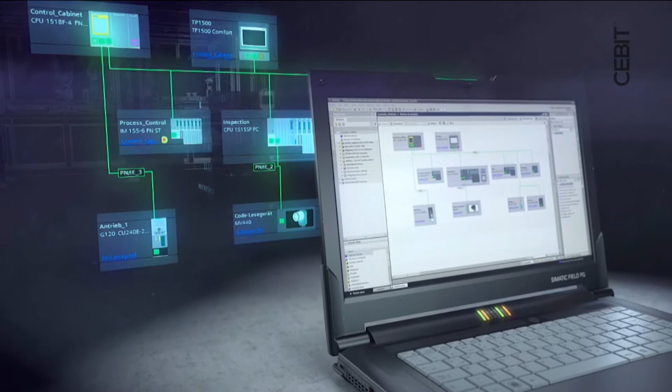Let's be very concrete now, and look at an example of what we did inside Siemens - our program controller, our Programmiergerät, which we conceived, designed, and produced in a digital way. The first step is the digital twin of the product. The digital twin means the digital representation of the product to do simulation, to do the design, and the simulation and verification of your design, in a multifaceted manner - with mechanics, multi-physics simulation, electronics, and software. This is very important because if you only digitize one facet and design only one facet, this won't work. You have to design and simulate all facets of the product.

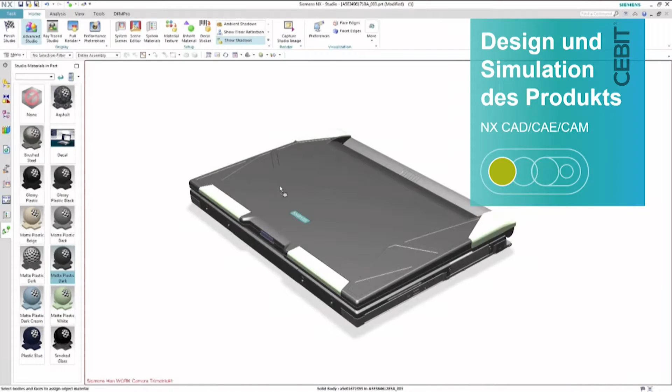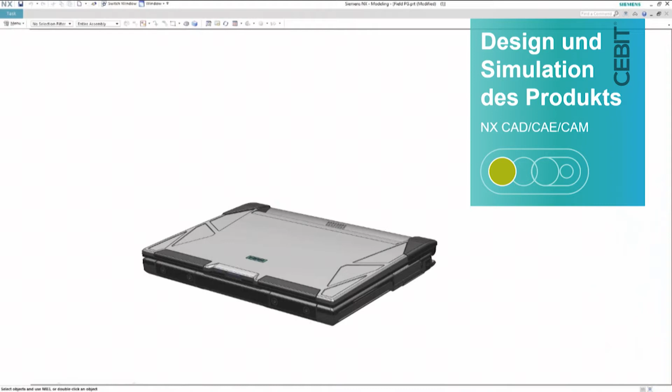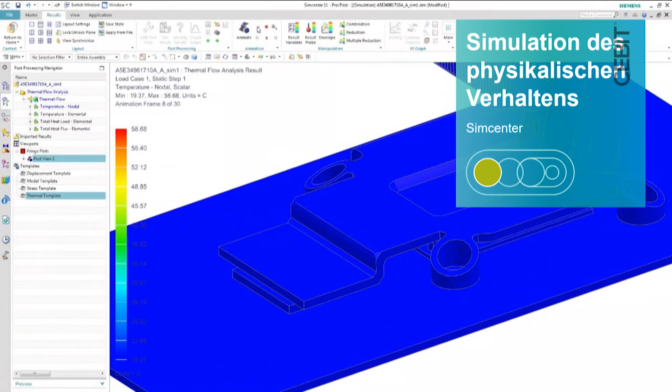To start with the mechanical design, this shows how - and this is not very new, we're talking about CAD systems for ages, 3D systems also - this is about simulating the product. The new thing is that in the same system, the same environment, you can design and simulate your product. So for example, if you're looking at the heat consumption of this product, you can do this with an integrated simulation in your CAD tool.

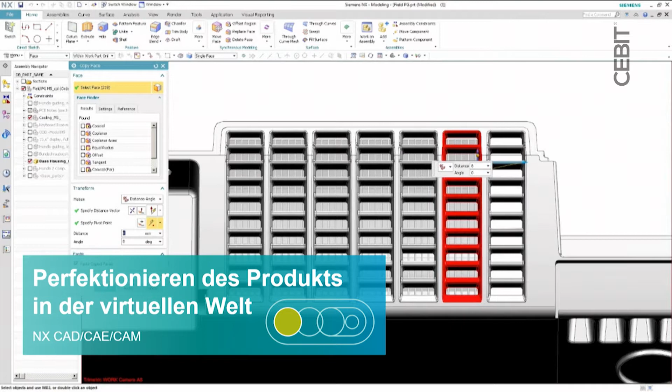Here you see that maybe the temperature is a little bit too high and you want to change the way you do the cooling, and you do this in an integrated way. You use the data you have in your design tool directly for simulation and arrive at an optimized product. So by shifting this a little bit, and in the next step, adding some fans and cooling possibilities, you avoid overheating the product - all in an integrated design of your product.

I'm not focusing too much on the product names. You can remember these are our products, but I was asked to give a presentation on the principles of digitization, not a product show.

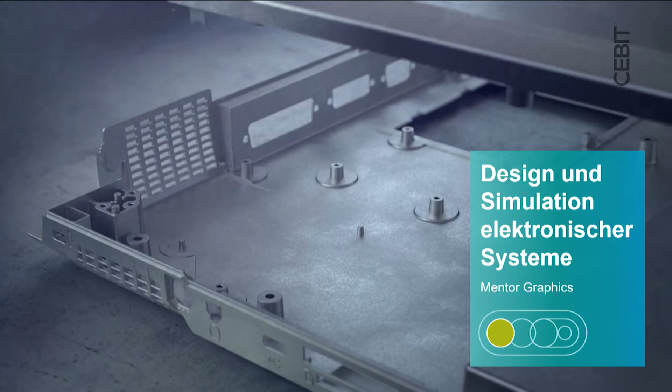Next step is to design the electronic insides of the product. We do this with a lately acquired software tool from Mentor Graphics, which allows you to combine mechanical design and electrical design so that you always have the overview and the interdependencies between electronics and mechanics. And for sure, you need simulation and validation of embedded software.

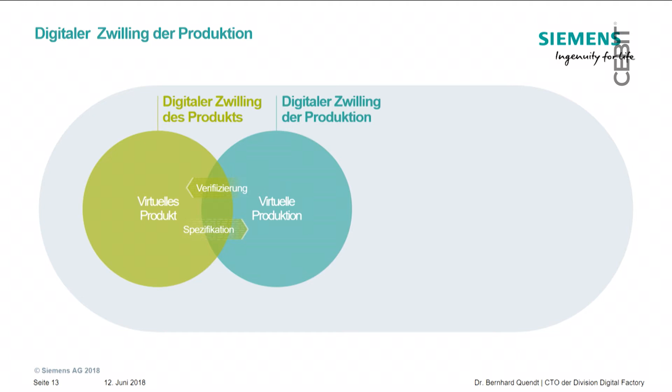With mechanics, electronics, and software together, you have the digital twin of the product. And then comes the next step. In the integrated digital value chain, you have a lot of data already generated during the design and simulation process, and you don't want to introduce this data again for production planning.

So in an integrated digital tool chain, you use the data for your production design, and you generate with the software tools of the digital enterprise software suite the digital representation of your production - we call it the digital twin of the production. So after the digital twin of the product follows the digital twin of the production.

With the data and specification you have from product design, you design your production. You have a lot of automation in production design, and you can use this to verify whether it fits the requirements of your product.

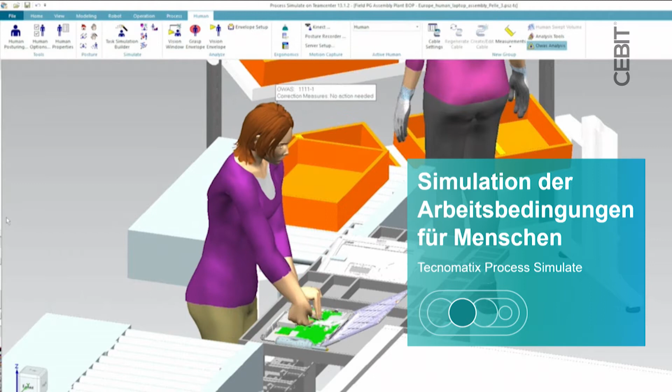I'll continue with simulations for production planning, as there's still important manual work to do in production. We can simulate the environment in which people are working to prevent, for example, any accidents or to prevent fatigue. We can simulate this with our tools.

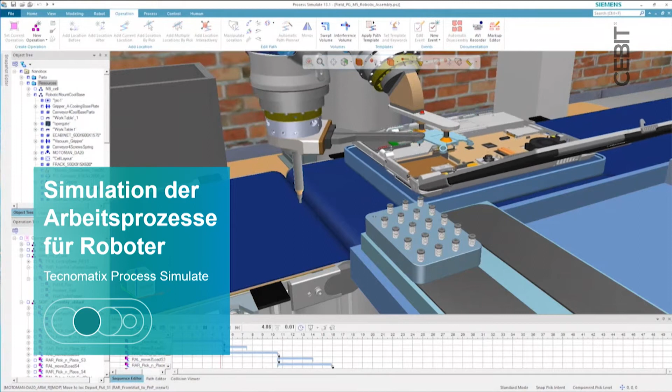For sure, we can also simulate the robots working and the production line producing this computer. There you can see that things like collision avoidance or optimal trajectories of the robots can be fully simulated before you build the production. This is a real asset because you save a lot of time and money if you simulate beforehand.

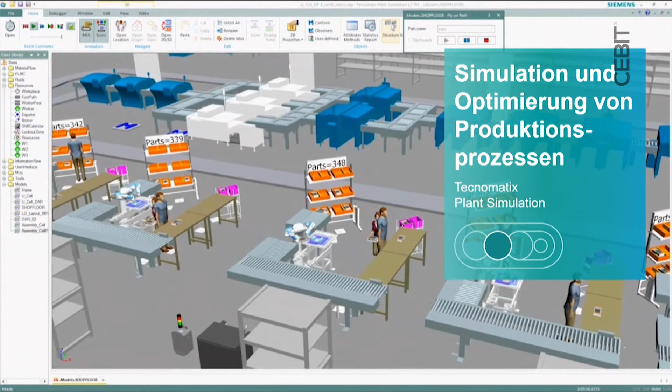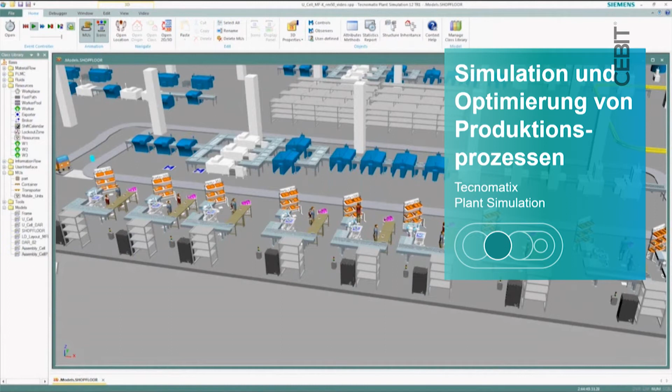Next step, after simulating the production lines, is to simulate the whole production. You can simulate the throughput of the plant, energy consumption, the quality and efficiency of your whole plant - and this is very important to know beforehand. You can also play around with the simulation, changing the order of production or changing some production lines to be more efficient. This is optimization of production planning by means of simulation.

Now imagine that since you have a lot of data transferred from product design to production planning, you can use the data from production planning to do production engineering, to generate the so-called PLC code. The PLC code - these are the controllers that automate the production plants - can be generated out of the data you generated during production planning. Not all the data; sure, you have to do some fine-tuning in the controllers, but you can use and reuse a lot of data there.

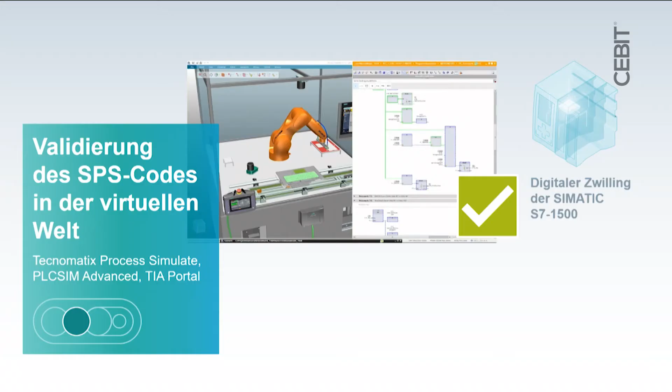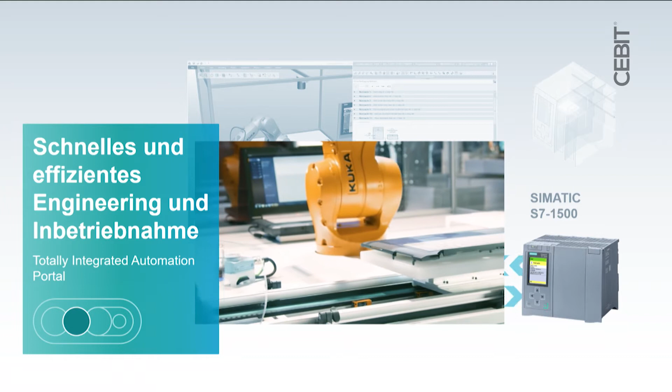You can validate this in a software-in-the-loop measure with the digital twin of our controller, or you can do that in a hardware-in-the-loop way, with the real controller in the loop between simulation and production line. This helps you do commissioning very efficiently, and our customers save a lot of time in commissioning if they do a virtual commissioning step first.

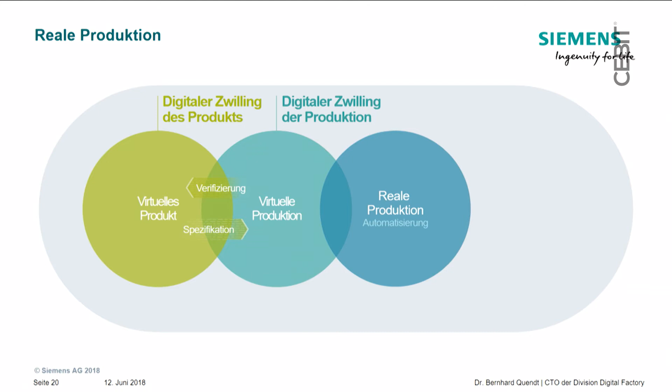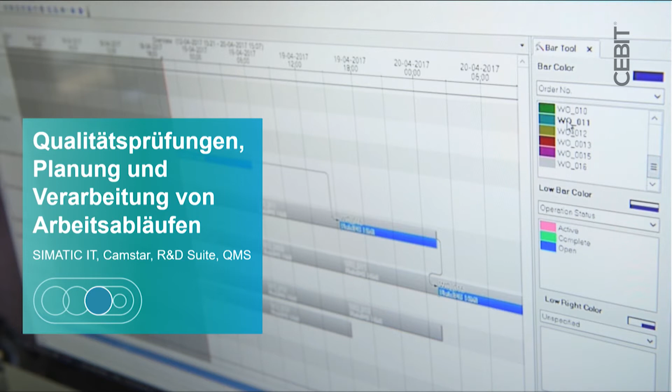So after the digital twin of the product, the digital twin of the production, we are going now to real production. Now we are coming from the virtual world, from the digital twin, to the real production. And this is done by our world-class and world-leading product suite, like SIMATIC, like other systems, like Sinumerik, like SINAMICS drive systems, HMI systems, SCADA systems, and so on.

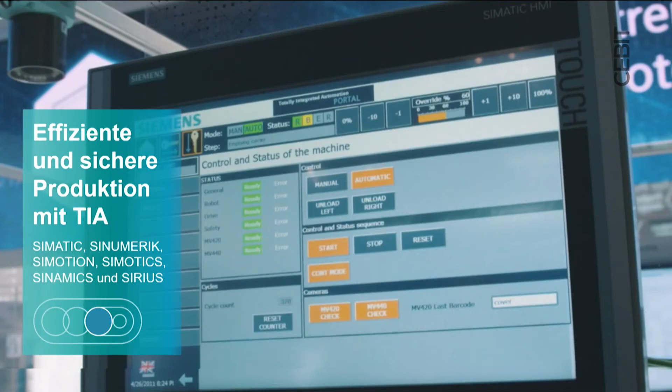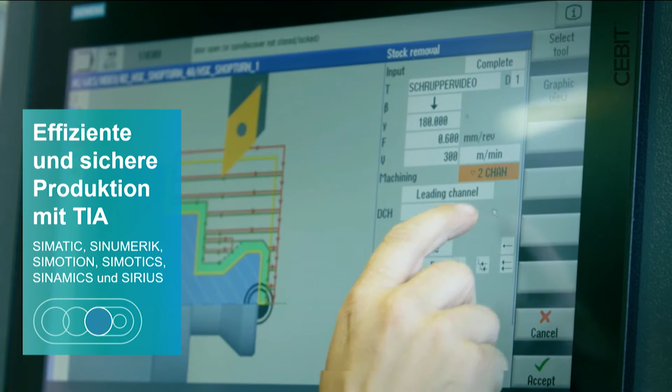During this production, for sure, it's important to have quality check marks, and the quality has to be assured during production. This can be done with a digitized system in a very efficient way. Also, the production itself is very efficient and is safe. So with our safety systems, you're always on the safe side of production, and you can make sure that everything that you conceived in the virtual world is working in the real world also.

Siemens is very proud and is looking very carefully on security, because in an open production system with all communications and in the use of a lot of software and digitization, the risk for hacking and so on grows. So we have designed and are sticking to a charter of trust, which creates a lot of trust together with our customers. And you can be sure, if you follow this approach for digitization, you have a secure and proven product, and you can also use our consulting services for security. Because I think this is very important. In a fully digitized world, you have to pay attention to cybersecurity.

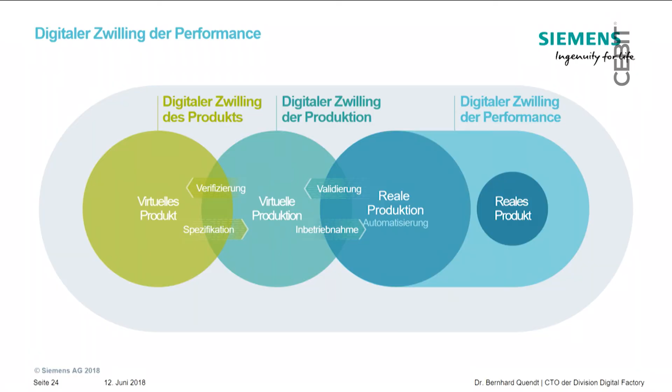Well, now, what to do with all the data that is produced by the products. So we are now in the step from real production, where the products now go to the market, and these products generate data, and you want to use this data. So this is our concept of the Internet of Things. All the things, all the production, all the products, be it the products, be it the production line, generate data. And we use this data to further analyze and to optimize the way to produce and the way how the product is designed and conceived.

The brand behind that is MindSphere. Maybe you heard about that. This is our open cloud-based IoT operating system, and there are a lot of apps and a lot of customers for MindSphere already that help to optimize the products and the production. So this is what we call the digital twin of performance, which uses the data out of the products, the data out of production to improve further.

And how to improve is shown on the next slide. We use the data from the field, we use the data from the products, and we use the data from the production lines to improve the products and to improve how to produce.

And if I say we use the data, this is not very precise, because this is something the owner of the production and the product will use, but not we as Siemens. For sure, we also use data, but this is in very close agreement with the one that owns the product and the production. We will never use data which is owned by the owner of the product and the production unless this has been agreed before.

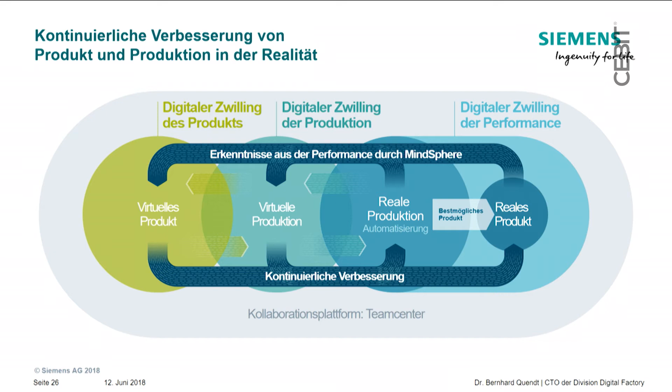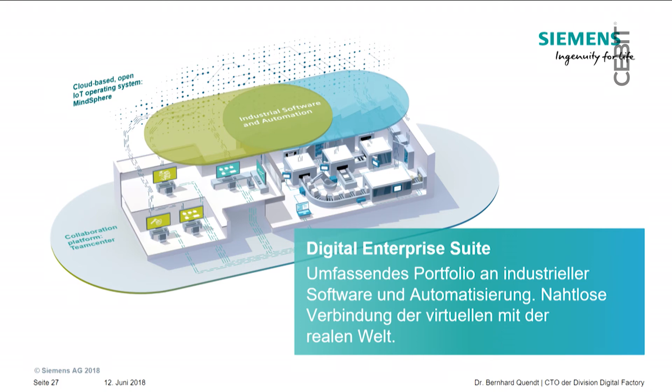Siemens is offering a digital enterprise suite, a complete portfolio to digitize all steps of the value chain, and we use what we sell. So we introduced all the digitization tools and methods in our own production plants, and we have more than 20 production plants inside the digital factory that were transformed to this digital world. And within Siemens there are a couple of more production sites that use these tools. So we know about what we speak, and we have proven systems in place also to change your way to design the products and change the way how you produce.

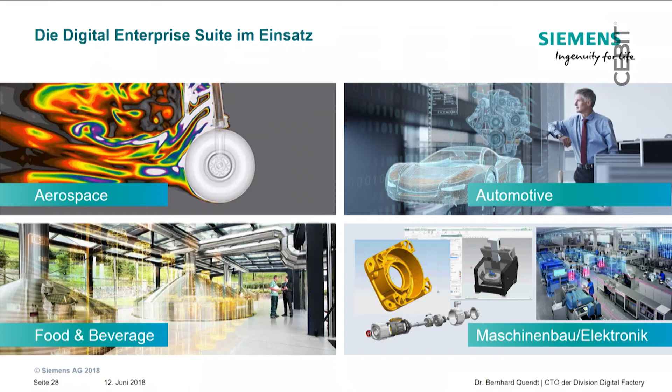You might wonder where these software tools and various methods will be introduced and used. Well, in the full range of industrial production, the digital enterprise suite is used. So, for example, in aerospace, in automotive, in machining and electronics production, but also in food and beverage. And I will show you an example and some results of what I promised before when I started the presentation: results on time to market, results on efficiency, and results on flexibility.

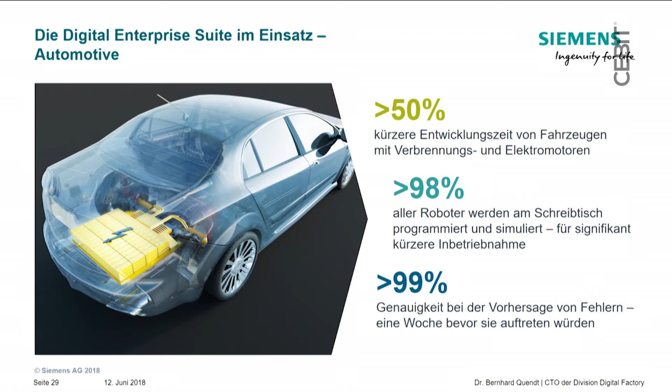So to give you an example, this is out of the branch of automotive. And automotive customers are using widely the digital enterprise software suite. So the results are very easy: there's about a 50% reduction of development time. We have a couple of concrete examples. For example, the new Maserati was developed, instead of 30 months before, in 16 months. So this is about 50% reduction in time to market, which is very important, as I said before, to be ahead of your competitor.

Nowadays, almost all activities of robots are designed, verified, and simulated before the first robot is in the production place. This dramatically decreases and reduces the time for commissioning and starting of production. And this is an interesting figure: 99% of the possible errors in the production can be foreseen by means of simulation at least one week before, so that you have enough time to correct and improve your production.

So with these three main results out of automotive, I'd like to end my presentation with a very short summary.

The digital change is on the way, and the digital change is, on one hand side, an opportunity. So take benefit of all the methods that software and communication is giving to your production, but also consider that a clear management decision is needed. I would recommend a clear management decision to transform your production to a digital one, because otherwise there's a certain risk and shortcomings, and it's better that you have a strong will and perseverance to continue with a started digitization process.